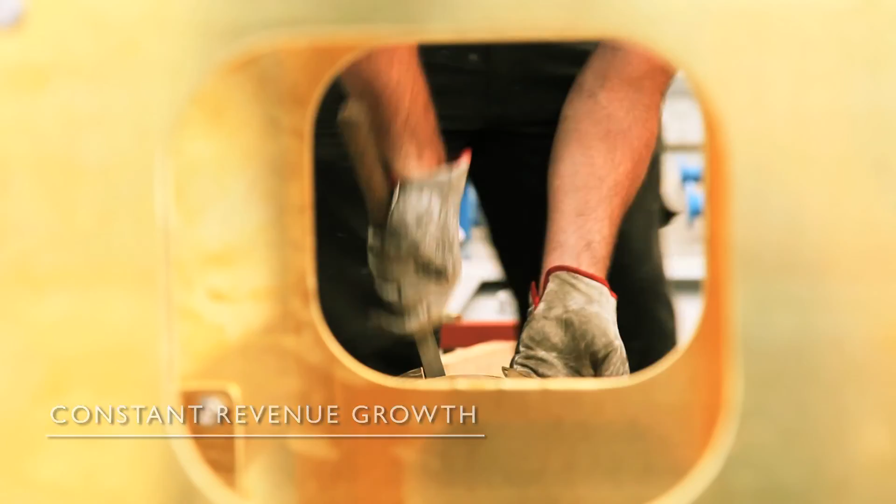Since privatization nearly 20 years ago, Termomeccanica Pompe has done nothing but grow. The facts speak for themselves. TMP has experienced constant revenue growth since 1995. It has followed an intense internationalization process, opening branches and subsidiaries in Europe, Russia, the Middle East, China and India. This internationalization has regarded not only sales, 80% of the company's turnover is generated from abroad, but also operations such as procurement, production and service activities. Staff totals more than 500 today.

TMP's success is not random. It stems from the company's 100-year-long heritage and its development strategies supported by the Termomeccanica Group. TMP belongs indeed to a holding company with a 107 million net worth and the prominent Italian banking group Intesa Sanpaolo as major shareholder.

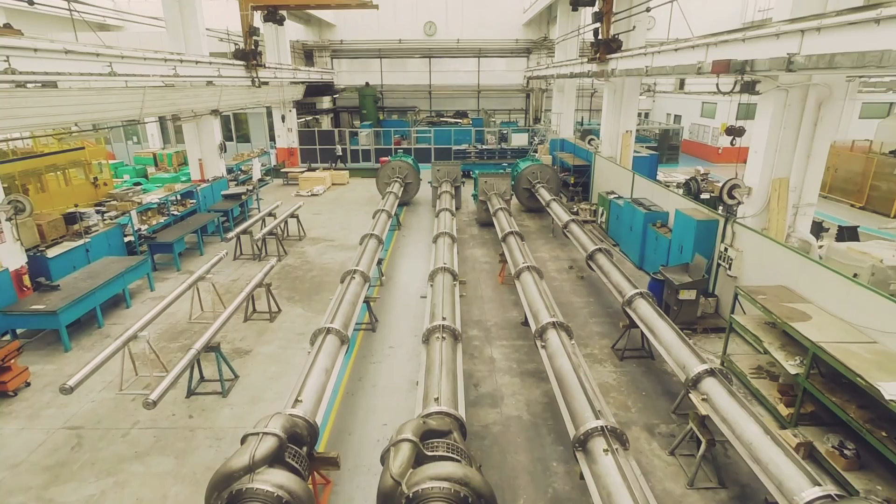In the power generation market, TMP pumps cover all main and auxiliary services in traditional combined cycle, geothermal and nuclear power plants.

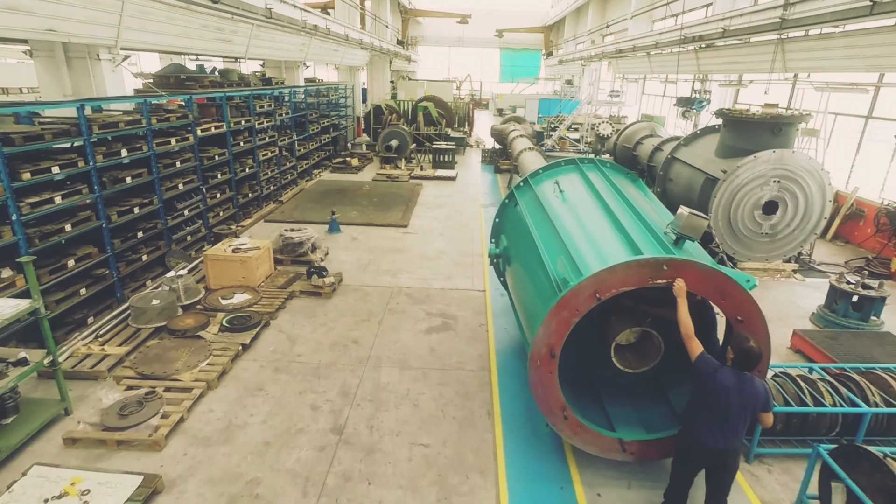In the desalination market, TMP pumps cover all process and water intake services related to the various desalination technologies, namely MSF, MED and reverse osmosis.

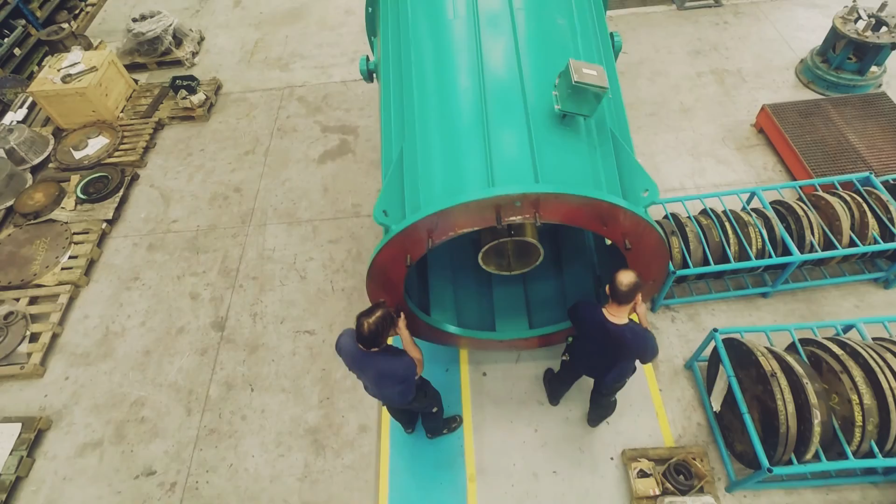In the water handling market, TMP pumps cover all main and auxiliary services in irrigation, land reclamation, water pipeline and water treatment plants.

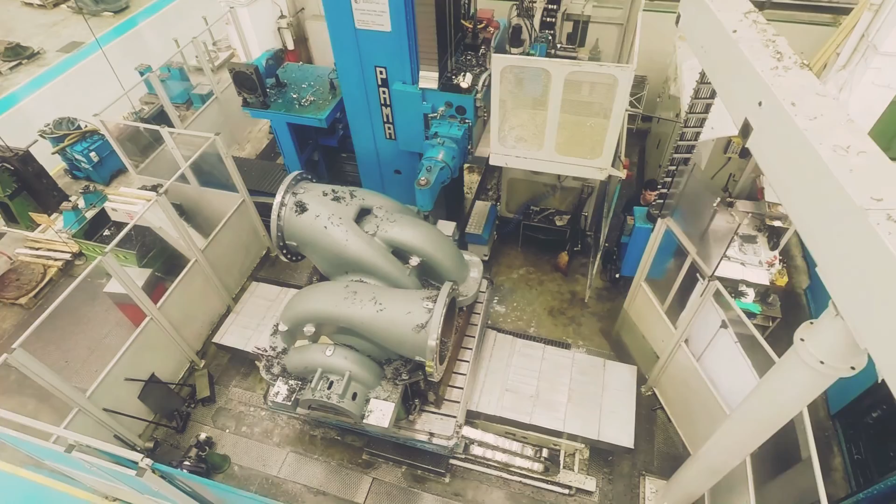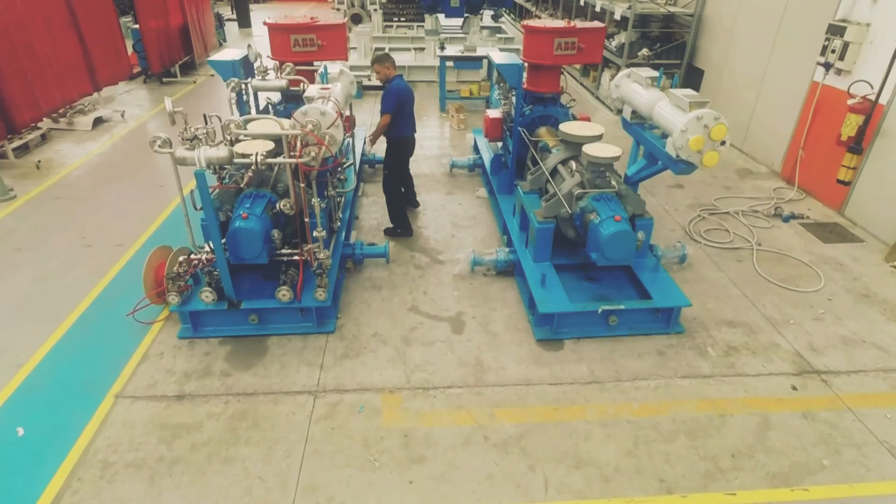In the oil and gas market, with its wide range of API 610 pumps, covering most demanding services, including oil pipeline, liquefied natural gas, water injection and offshore, TMP is present in the upstream, midstream and downstream sectors.

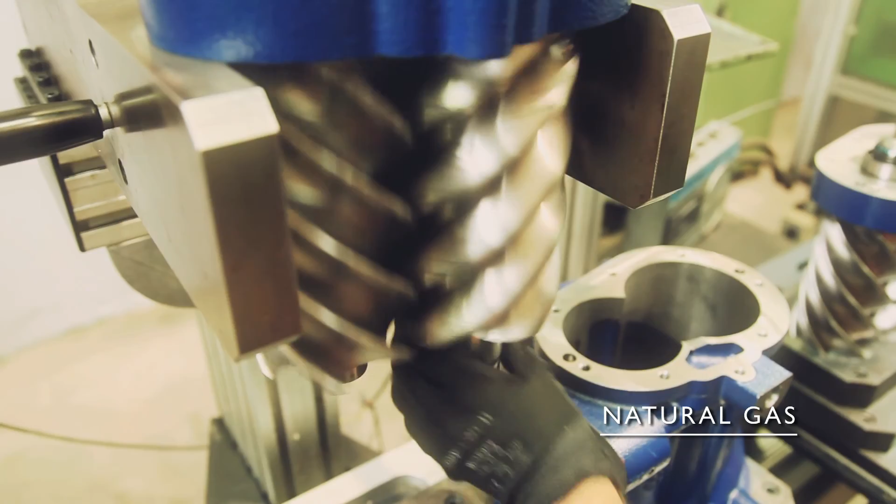TMP is also about air and gas compression. Its bare shaft compressors division and its packaged dedicated companies specialize in developing compressing solutions for any type of gas, namely natural gas, biogas, CO2, hydrogen and flare gas.

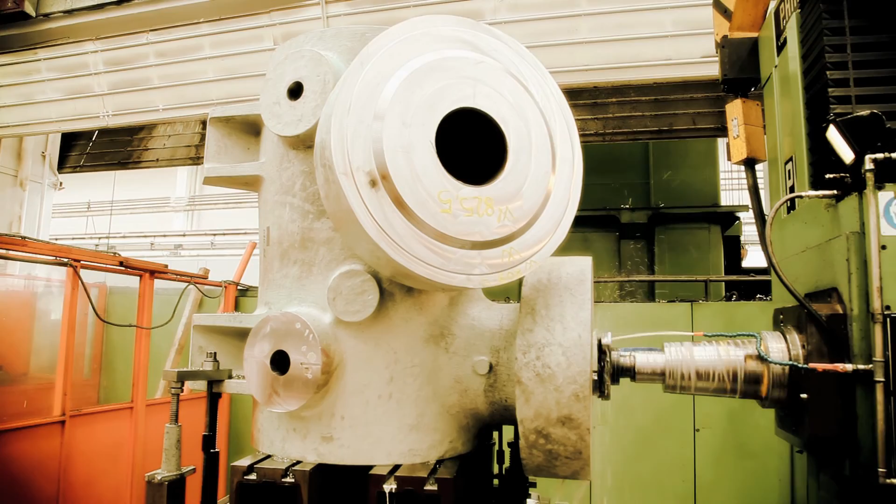The Zubair water injection pump project, one of the most recent and complex oil and gas contracts acquired, clearly illustrates how TMP has developed from a simple manufacturer of centrifugal pumps to a key supplying partner, offering all-encompassing customized solutions for the efficient and reliable management of its customers' plants.

A consortium led by Eni Iraq BV is TMP's customer for the Zubair oilfield water injection pump project, while the end user is the Iraqi Ministry of Oil with its consultant South Oil Company.

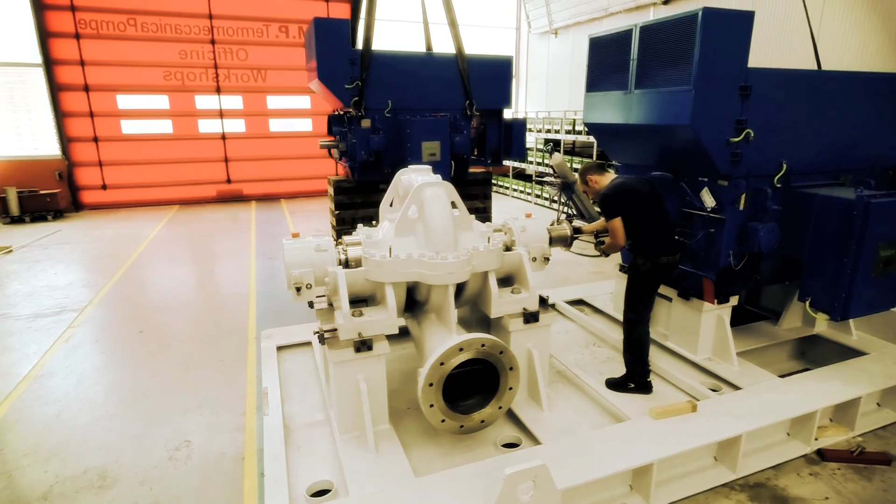TMP's supply consists of 24 API 610 pumping systems divided into 12 pumping units, which include the operation and monitoring of the stations injecting water into the wells to extract crude oil.

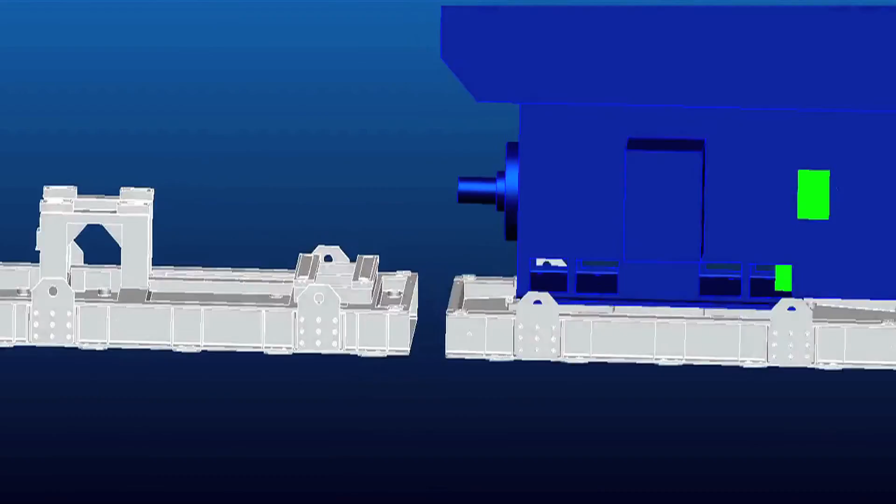Each pumping unit is composed of a main injection pump, API 610 BB5 type, with a total capacity of 1,100 cubic meters per hour, head of 2,000 meters, installed power of 8,700 kilowatts, and speed of 5,600 RPM.

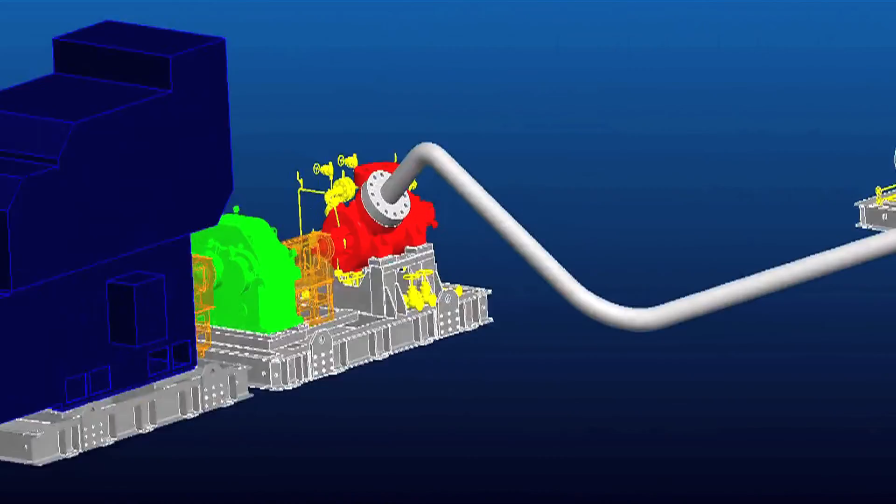As well as an auxiliary service booster pump, API 610 BB1 type, with a total capacity of 1,100 cubic meters per hour, head of 106 meters, installed power of 500 kilowatts and speed of 1,485 RPM.

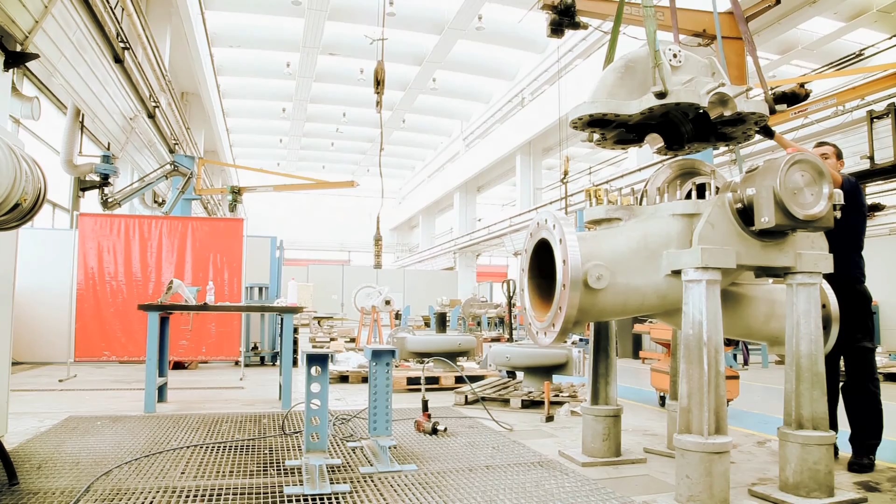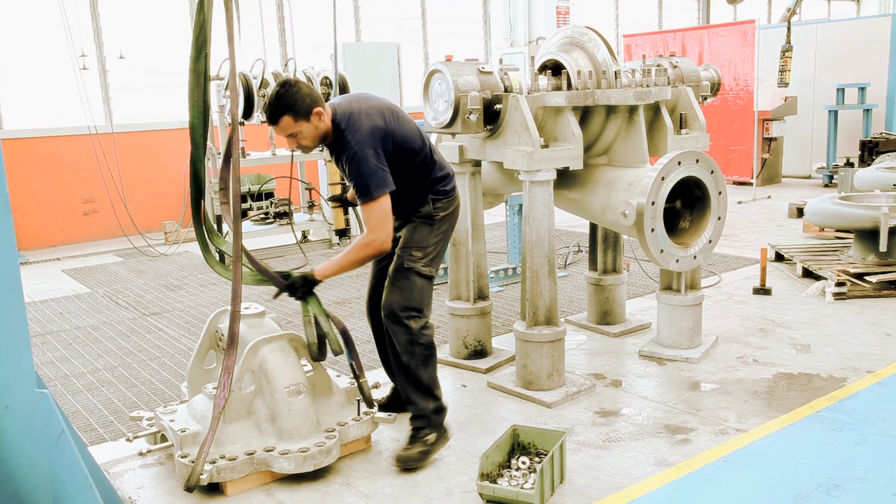The pumps are driven by electric motors with variable frequency and a mains frequency converter and transformer. Finally, the machinery is monitored by electronic systems with cutting-edge technology grouped together in specific local electrical rooms.

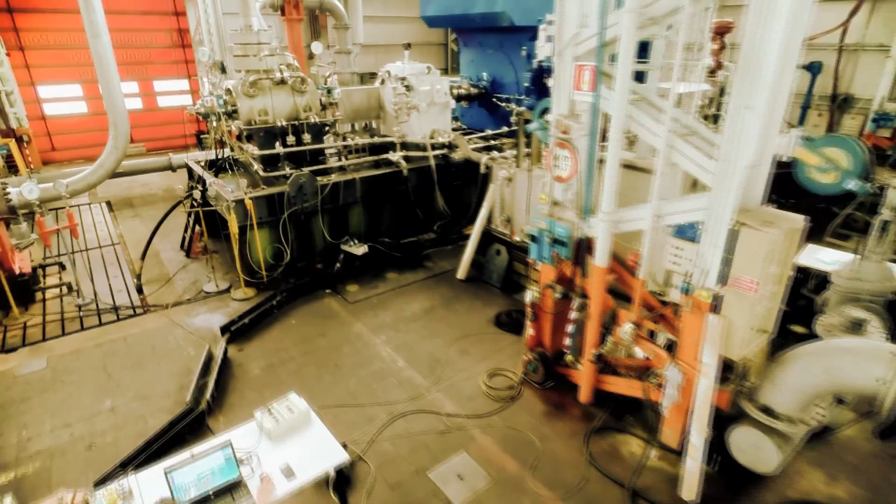The string test of the pumping unit, with all its auxiliary components in the final on-site configuration, was requested by the customer. TMP is actually one of the only companies in the world with the know-how and facilities to support such a complex test setup.

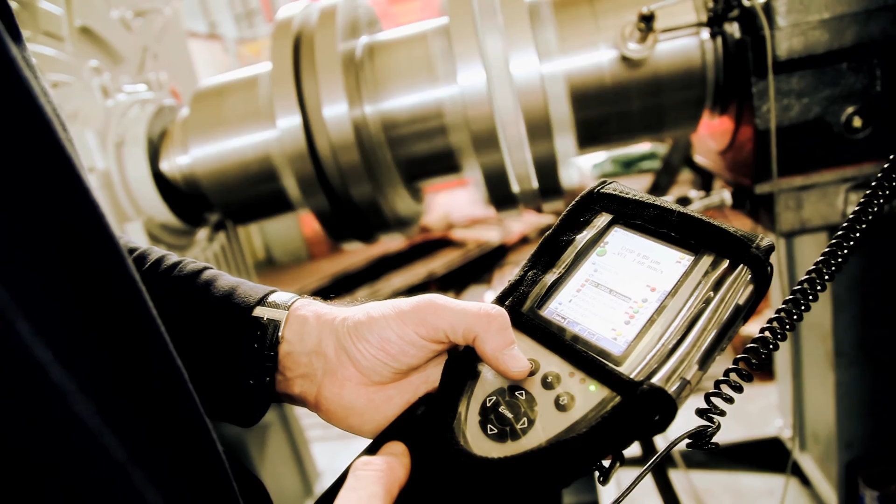Which has required an area of 1,000 square meters for the positioning of the components, a total power of 10 megawatts, the purchase of a power transformer equivalent to the contractual one.